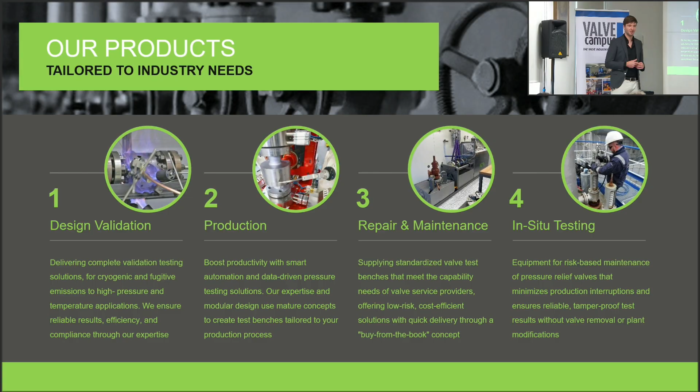Now, I'm not here to present about our products today, because I could spend a week talking about how fantastic our products are. But today I'd like to tell you about what we feel is our responsibility in the market, and that is to innovate with the perspective we have. Our company mission is to contribute to safety in the industry, and a direct derivative of that is the test bench, because it's a quality control device. We'd like to think that with input from all different players in the industry, we can improve these test benches to a point where they automatically contribute to safety in operation. This is one of the core things we'd like to do. This is our mission statement from our CEO, and exactly the reason why we're here, and why we do this on a voluntary basis. We don't get paid for this, we don't make money off of this, but we do have insights which could be very relevant.

To give you an impression of what we've done this year, for 2025 we had 3 main projects on our agenda. The first was to standardize on safety screens, because on a global scale there are a dozen fatalities while pressure testing every year. People who are not properly protected from the dangers of pressure in untested objects, causing incidents and in many cases loss of life. So we set out to standardize safety screens, just to make the decision for safety easier.

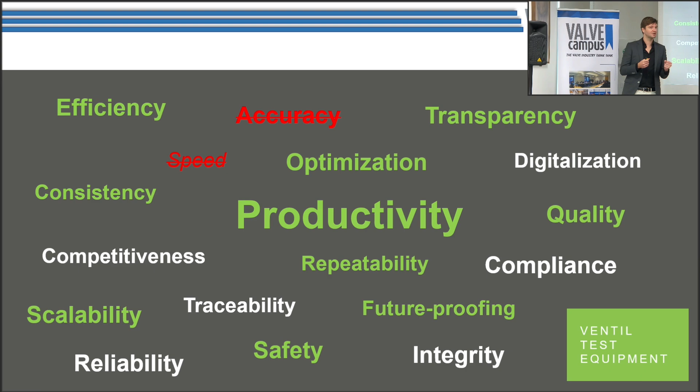Well, to carry on this, I think that at least two of these are never really relevant. So again, this is something I got from the internet, ChatGPT, just generalized information. And I always feel that accuracy and speed, they don't go hand in hand with automation. Because if you buy a CNC milling machine or a lathe, it doesn't get more accurate. You can't get more accurate parts produced from that machine because it's automatic. No, it has a high grade of repeatability, but not necessarily accuracy. Machining by hand could still be more accurate.

And it's the same argument with speed, especially for valve testing. Some things you cannot really speed up. So can a machine do something quicker than a human being can? If that human being has been doing it for decades, all of his professional career, then maybe he is much quicker at it because he has feeling, he has experience. He can correct for things on the fly, and a machine cannot do that. So speed is a very poor argument for automation. All of the others, I would say, probably relevant in some shape or form. But do they really give you an argument to automate your valve test bench today? I don't think so.

So let's bounce back a little bit. Because we're talking about automation, I could speak about this for days because it has many different aspects. So let's establish a small process to have a benchmark, to know what we're talking about. And let's consider a simple valve. So the standard is EN12266. Pretty much the basic valve that we know in the industry, right? You could argue, well, why not take an API 6A valve because it's much more elaborate. Quite simply, it's just more steps that I need to go through. It's just about establishing the benchmark for now. So let's take an EN12266 valve for the rest of the day. This is the benchmark process.

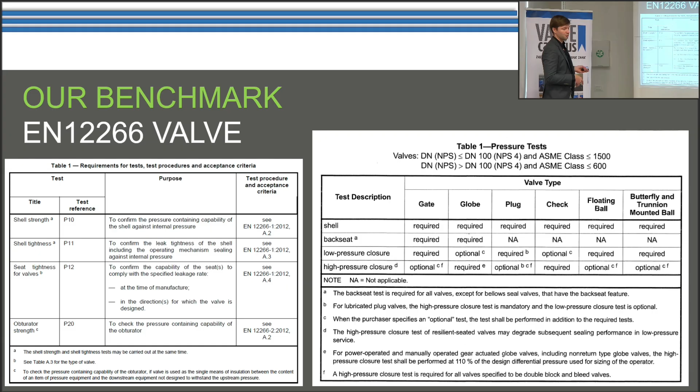And what do we have to do when it comes to testing? Again, keep it simple. If I look at the matrix for these standards, on the left here you see the requirement from EN12266, and on the right you can see API 598. There's a few small differences, but the essence is always the same. There's a few different tests that I need to go through, and it's the minimum that I need to provide. And it's the same if you follow any API, EN or ISO standard, because we always need to do similar things, right? So it's strength, tightness of the seats, and then probably something with what they call the obturator, which is essentially operating the valve, open and close.

So looking at definitions, throughout the presentation I will be using the codes. So P10 basically means the shell strength test. It's easy. I think everyone knows this, right? It's a hydrostatic test. Pressure is 1.5 times working pressure. There's a test time specified. It's based on the valve size. It's simple stuff. You can test it with liquids.

You can test it with gases. And the key thing here is that the criterion is visually detectable leakage for a liquid. So do I see water coming out? Then it's a leakage. And if I test with a gas, then essentially it's also visual leakage. Because either I use leak detector spray, which means that I get bubbles, and bubbles I can see, so I can see leakage. Or I submerge it in water and then I see bubbles again. So again, it's visual.

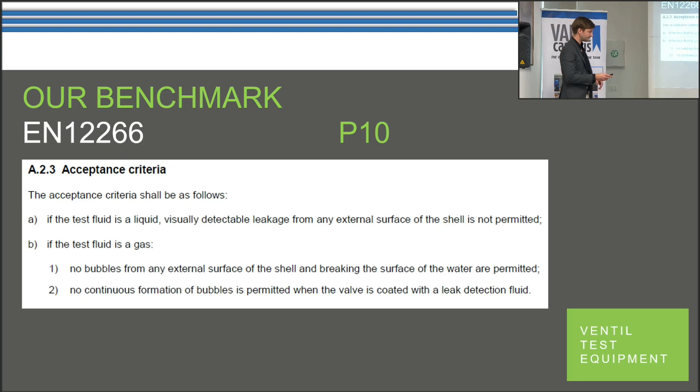Onwards. So these are criteria. Again, 100% visual. For P11, which is essentially external leak test, so it's a repetition of our strength test, but I don't need to do it at the same pressure level. So the standard actually tells you that you can combine both tests. So you can do one test and they represent P10 and P11. And again, the criteria is essentially the same. The only difference is that they demand that there is pressure on the entire valve.

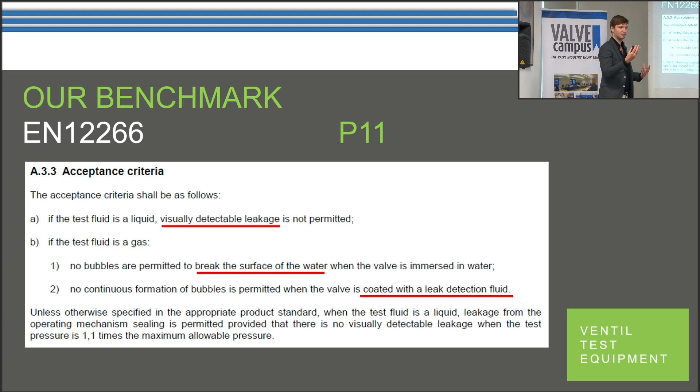So in API 598, they would call it, I think it's backseat pressure test, which means that pressure is everywhere. So you check the entire valve for leakage. But again, criteria is pretty much the same, right? It's visual leakage, period. And keep that in mind, because visual leakage is something very hard to automate.

So just to carry on, so we have seat testing. Now this is different, because here we have acceptable leak rates, which means that some valves are allowed to leak, which means that we want to be able to quantify leakages. So this is what you do with bubble counters, flow meters, instruments that everyone who has done a test will probably know.

And if I tie that together, we have a test process that we have to go through. The test process basically consists of, I need to do some setting up, because my valve doesn't seal by itself, so I either put it in a test bench or I put blind flanges on there. I need to do all my preparations to make sure that pressure can be contained inside that valve. That's what I call setting up. Again, we're just talking about benchmark process, so you understand my train of logic going on.

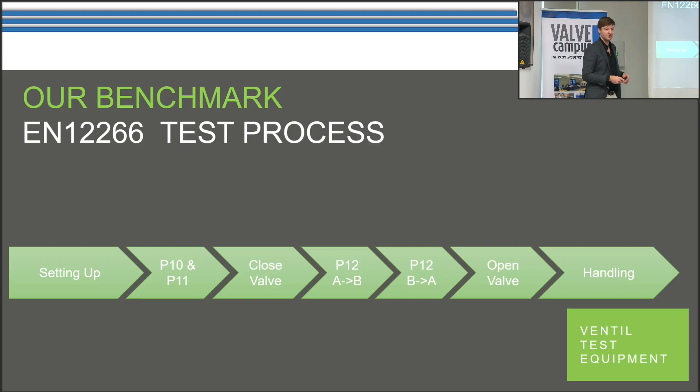Then if we're testing hydrostatically, we fill it with water. We can do test P10 and 11, which is a body test, shell test for the Americans. Then probably we have to close the valve. So this is operating the valve stem. We probably have to do 2 seat tests, so 2 different directions. We say one side is A, the other is B, so we have direction pressure A towards B and B towards A, which means pressure on one side, and the second side is the side where we measure leakage.

Once we've done that, we open the valve again, we drain it of water, and essentially it becomes handling again, because we need to do something to take it out of the process. So usually setting up is clamping the valve. It's things like setting up the process, filling, things that don't directly contribute to the test result, but we have to do it to be able to perform the test.

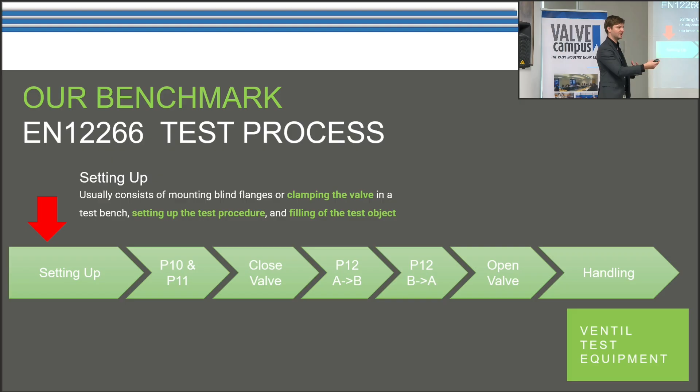Then main limiting factors, especially when you talk about speed, because I discredited speed. I said I cannot be faster per se, because in fact I have limiting factors. I have a particular test time that I need to follow. It's the minimum requirement, which means that I have to do it in a particular way, and there's no way I can stretch that. So clearly, I cannot touch this. This is what I have to do.

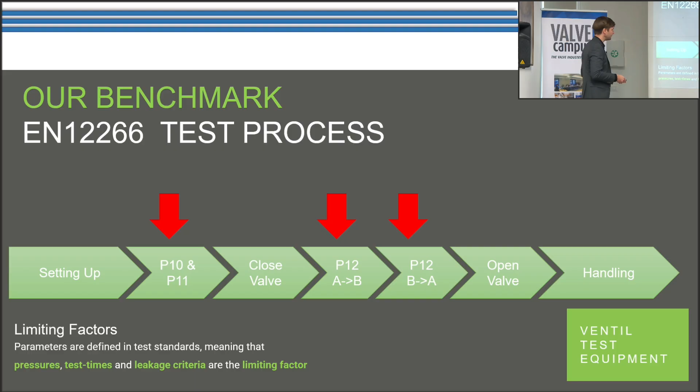Then opening and closing, it really depends on the valve that you produce and the information that you want to gather. I could open it by hand and register no information, just to see if I operate it, does it work? I could do it automatically. I could measure torque to see what is the slip-stick on my ball valve. Is there a point of resistance? I can even relate that back to, is it relevant to the process? So can I predict faults coming from my manufacturing process based on the data that I gather? But you don't necessarily have to, basically.

And then finally we have handling again. So it's draining, drying, preservation, things you need to do to make sure that the valve is ready to be put on a pallet and maybe shipped to a customer directly. So this is my benchmark process. This is what I'd like to use to talk about the main subjects, the main reasons for automation.

And again, I feel this is not what we're pursuing today. This is great high-level philosophy. This is a nice dream to have, but it's not tangible. It's not something you want to achieve within the next few years. I do not believe that these are the arguments you want to use. The arguments that you do want to pursue, because they will bring you some sort of benefit in fairly short time span, are to digitalize test results, to increase productivity, to have a sustainable workforce, and to have a more competitive edge.

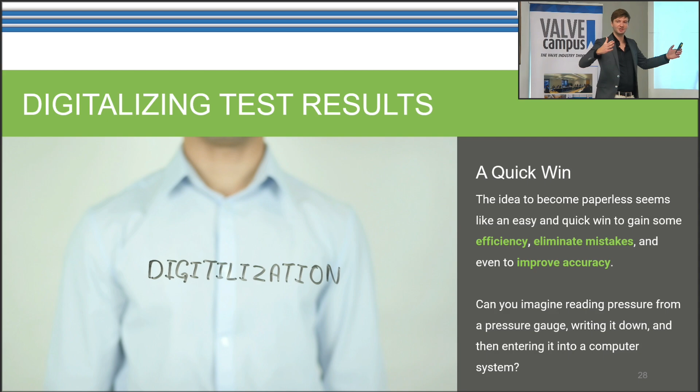So what went wrong? Very long time later, they found out that they had a test bench. And it was a hydraulic test bench, and it was a very unintelligent machine. So it relied on an operator. And the guy put so much force on the object that it actually shrunk. It got smaller because of what the operator did.

And the reason they didn't find it is that they did the dimensional check before testing. So everything's okay. I put it in the test bench. It gets smaller. I don't check it again. And now I have a quality issue.

So it's not necessarily about the test result that we're trying to achieve. It's about what do we do? What are the steps we go through so that we can build the confidence that this is okay, that this is good enough? Because in a perfect world, we want to eliminate that inspector, and we want to have a process that we can execute, and the result of that process is good enough that we can accept it as valid, as good enough. Because that brings you efficiency. It takes out cost. This is a form of automation.

So fast forward, if we look in the industry, what are the main initiatives to achieve things like this? There are very few that actually get off the ground, but the biggest one, which is getting traction nowadays, and you don't see it in the news, is the Material Digital Passport. And the Material Digital Passport is ultimately an initiative carried by IOGP. So it's a group of energy companies who join together in an effort to standardize specifications of valves under JIP 33, and they also have a specification on how the Material Digital Passport system should work.

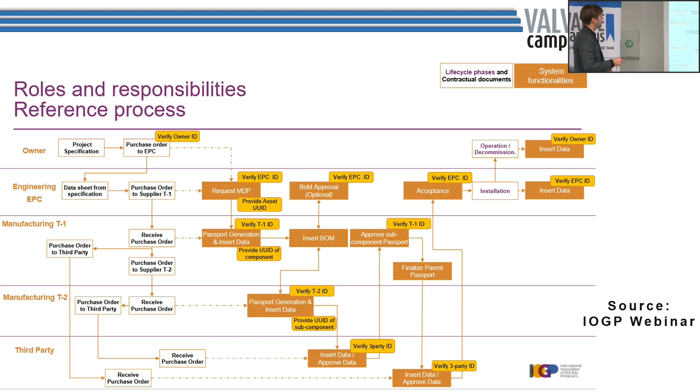Now, if I use one of the sheets to show the relevance of MDP, what you can see is that this is the entire simplified process. The idea is essentially that the end user, the owner, has a project specification, hopefully based on JIP 33, which means it's standardized, and they place a purchase order to their EPC. The moment they initiate the project, they essentially start by creating that MDP. So this is the birth of the identifier for every single component which is going to be used in your facility. If you think about it, I could talk about the entire rest of the process, the steps to initiate interaction between all the parties, because the EPC will buy valves from you, you will buy components from different suppliers, and everyone in the value chain ultimately needs to provide information, which is then verified by third parties, and all the different layers throughout the structure, which makes it a wholesome MDP.

But the reality is that if we look at what MDP actually is and what the structure is, I can sort of say that it's my ITP, my inspection and test plan. Because JIP 33 is essentially a purchase specification, and if you think about it, every valve standard is a purchase specification. It says this is what you need to do to provide a valve, this is the evidence you need to provide. MDP is the same, but the difference is that every component has an identifier, a unique code to differentiate it from all the other components. So MDP potentially has the ability to replace an ITP in a standardized format, which is beneficial, because when you get your purchase order, it means you already know what to do. From the system, you get the request basically from your ITP: this is what you need to provide in information. And the benefit of digitalization is that you tie every single thing together, which means I don't need to enter it by hand, which would be a waste of time, but I try to automate it. This is the essence.

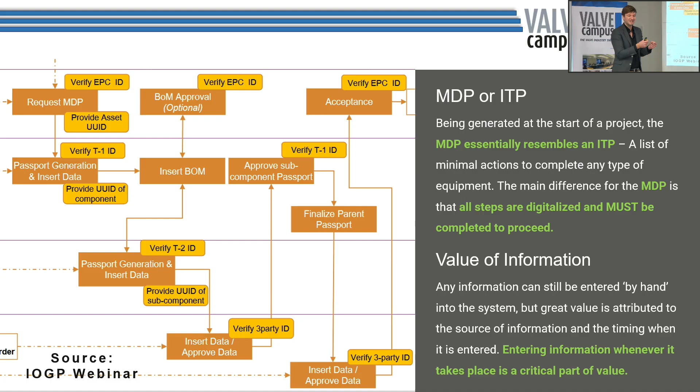So let's move forward, because now we have to talk about test benches, and I have to keep an eye on the time. So this was our benchmark process. So our EN12266 valve, how are we going to test it?

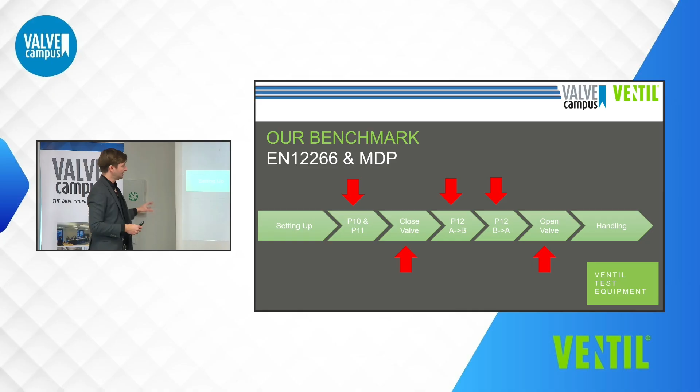The steps that we want to look at, the steps that are relevant for the MDP, are basically our pressure tests: strength, leak tightness, and seat testing. That's the minimum information that I want to provide. Depending on the kind of valve, I might need to provide information on opening and closing of the valve as well, especially if you're building actuators onto there, you might need to justify that. So this is all information that I want to register.

I want to capture that during my test. And if I look at the architecture that we use in our test benches, which is essentially a software architecture, we layer it in three different levels of control system, essentially.

So the most basic layer is instrumentation. In our instrumentation layer, we have the device itself that does a measurement, so a pressure transmitter, a torque cell, something capable of measuring our process parameter, which we need as evidence for our process.

Then the next layer is our control layer. What does the test bench do? Now again, I'm talking about an automatic test bench. If you think about, for instance, a strength test, it essentially consists of filling the valve with water if it's hydrostatic. Then I want to be sure it's full of water because it could alter my test result. If I have air, it could prevent me from seeing pressure decay, for instance.

I pressurize it to a particular pressure level. I want to know how long I stabilize my pressure before I start test time. Then I have test time, and afterwards I want to release it, but that's not relevant for the result. That's what happens in our PLC layer, a PLC that controls the actions of the machine to make sure you go through the process.

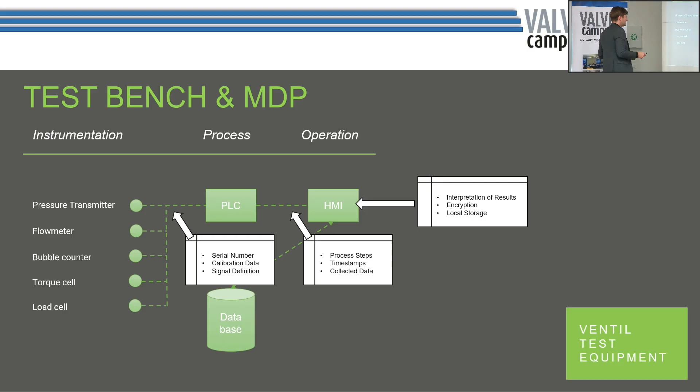So in that MDP, what happens is you get a purchase order in your own system, over here on the right. The moment your purchase order comes in, you get your tag numbers, your identifiers from the MDP, which is essentially turning into your ITP. This is going to be leading for the rest of the process.

And probably you have an ERP system where you enter that data, because you're a commercial organization, so there has to be some sort of work order.

Now then, two things could happen. Either it's a standard product for you, so it's a matter of press the button—and I know this sounds fantastic and might not be the case, but it's what we dream of. Then basically your manufacturing execution system knows what we're going to produce. Purchasing has to get the materials. We can schedule the work, allocate machinery and locations, and you get your project scheduled.

And the alternative is that you still have to do design. So for the test bench, the design phase is actually interesting, because some of those parameters, some of the features in your valve, might be relevant for how you perform the test. It's not test time, right? Could be, but not necessarily.

What it could be is that the dimension is so different that if you have a CNC test bench, you have to compensate for that. So you need to have that information in the system.

And the idea is that when you design a valve, you create your design, you prepare it for the manufacturing execution system, but you also put it into the test bench, because once you've designed it, you can build it again, basically. So there's a line of communication there, which has nothing to do with the MDP, but it is critical if you're really talking about automation.

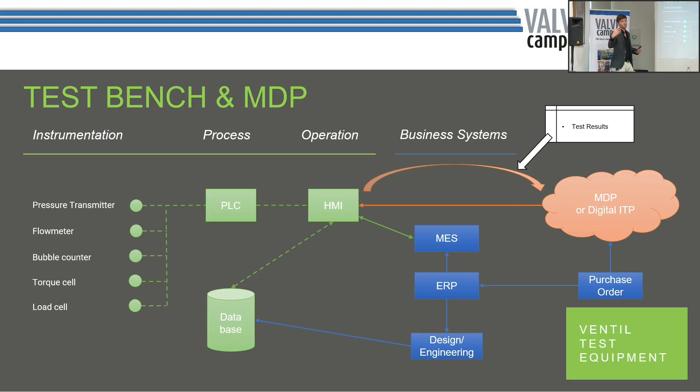The emphasis here is that if you look at a test bench, the thing we're doing on a daily basis, this element here, what I boxed, is something you can certify. This is the reason we asked that third party, is there a way we can certify the process of a test bench? Because if you're looking to save cost, to be more efficient, what you're trying to do is eliminate any losses along the way.

And it's some big things like, do I need an inspector to be there? Well, if he's not there, it saves money, it saves logistics, because generally when the inspector is there, it's quite an annoying time, except if he's a nice guy and pays for dinner, but generally we have to pay for dinner, right? So the better I can certify this process and create that layer of relevance, the less I have to do along the way, which means I can save money.

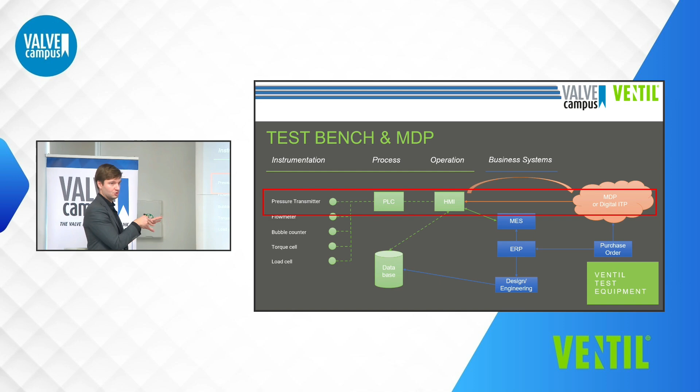And this is what test benches will do in the future. This is near future, what we're preparing to do in the next few years. Obviously the pilot phase will be difficult, but ultimately it's something that needs to happen and we'd rather do it now.

So our strategy is quite simple: we want to digitalize instrumentation, step one. We want unique identifiers on the measuring equipment, and we already do it for our online testing. Product group number 4 that I introduced to you is online testing of pressure relief valves.

In that system, we only use digital instrumentation, which means that when I choose a particular instrument and plug it into the system, it recognizes the range, and either it's correct or it's not, and then it will tell you we cannot proceed because this is not okay. It will tell you the serial number, the calibration data, which means that when we run the test, we know exactly how it was performed, and we know that the test result from that particular instrumentation is correct.

And then the next thing is that if you go through the process steps, we are essentially steering towards a process where you cannot deviate from the right steps to follow. So you have to do everything in the right order, which means you cannot tamper with the result.

For that online testing, for instance, it means that if you go through the steps, we actually record the steps that the operator goes through. So you get a certificate, but you also get a video of what someone did when he was doing the test, because it's evidence to show it's reasonable that he did it in an okay manner.

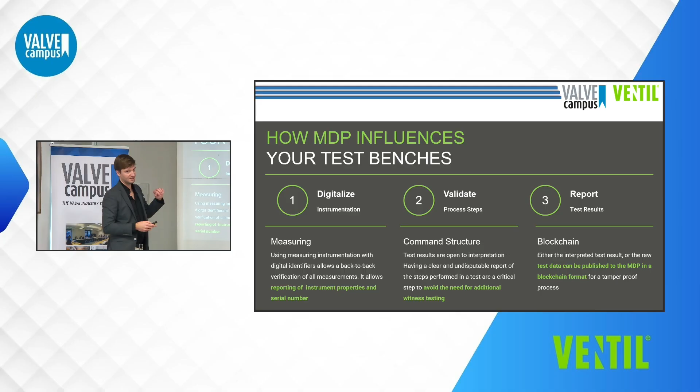And then ultimately, when you get that validated result, that package of information, exactly what you need to report, you would send it into that MDP, which is essentially, again, popular terms, but probably a blockchain encryption to make sure it's tamper-proof, and send it into that cloud where it's accessible to everyone. So this is the shift in test benches going forward.

Now I realize this sounds like future talk, could happen in 10 years, 20 years. I consider myself a young guy, but in 20 years I'll be thinking about retirement. So how relevant is this? And if I have to explain how relevant it is, I would say argument number 1 is that end users are saying this is going to save them 10 to 20% in costs for new projects.

And if you realize how big their projects are, the cost saving is huge. So for them, there's a big drive to do this. Even their lead time will go down by 25 to 40%, which is a huge saving for them. But it turns into our problem, because they save the money, but we don't, because we have to put in the effort, which means that we want to do it in advance. We want to think about it. We want to control the system, that it works for us. Not that the end user says you have to do it like this tomorrow, because then we have a problem and then we're probably more expensive.

Another interesting thing is that if you do things like this, inevitably it will be more efficient. So the investment is quite high, because you have to change your processes, you have to take into account everything you need to do to make this happen.

But actually, if you look at what we're trying to achieve, we're not shifting from Industry 3.0 to 4.0. If we're doing this, we're getting ahead of Industry 4.0. Because Industry 4.0 just means I want to capture big data so I can have an opinion about data. And Industry 5.0 is actually about how do I use that data to create more integrity. So looking into the future, Industry 4.0 is easy to achieve because I just measure something. I add a pressure transmitter, I record all of that data, and I can say I did Industry 4.0, period. Easy, easy win. Good for me. Maybe some government subsidies, love that, great. But the real story is that Industry 5.0 is happening today. So taking that data, going to that extra step in your factory.

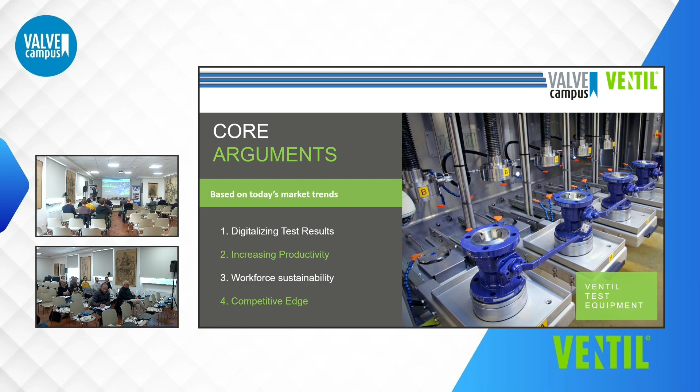So step one, just to remind you, this is our benchmark process. So still we have our EN 12266 valve, and the only thing we're pursuing for all of these test benches, just to simplify, is essentially body testing, seat testing, and everything we might need to do to that valve.

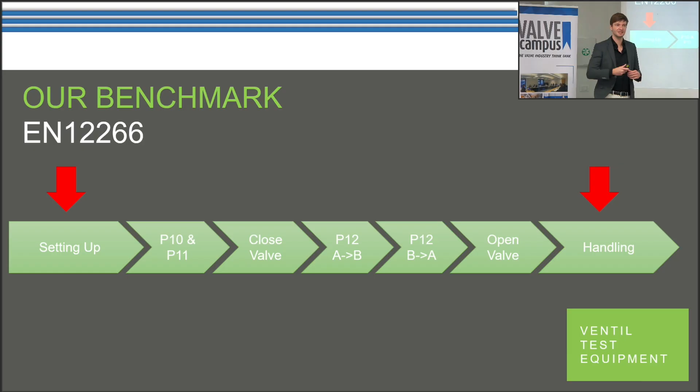So when we talk about increasing productivity, one of the first things that we can consider is the steps for setting up and handling, which is normally the task of an operator, someone who has to prepare the valve for testing. So he has to put it inside the test bench, he needs to put blind flanges on there, maybe he needs to operate the test bench by hand to go through particular steps. And in the end, he has to undo everything he did to the valve. So they're all steps which take time of a human being, but they are necessary things to do. So you have to go through them. And they are essentially steps that you can work on.

They're things that you can try and optimize, because ultimately if it saves time, then it will help your productivity, because the shorter the process takes, the more you can produce, which means you're more productive. Simple stuff.

So when you look specifically at setting up and handling, what you'll see is that about 99%, if not more, of all test benches worldwide are simply loaded and unloaded by hand, which means that it requires someone to be at the test bench to keep the test bench in operation. Whether you automate it or not, there is usually someone there who has to put the valves in, maybe has to open and close them as well.

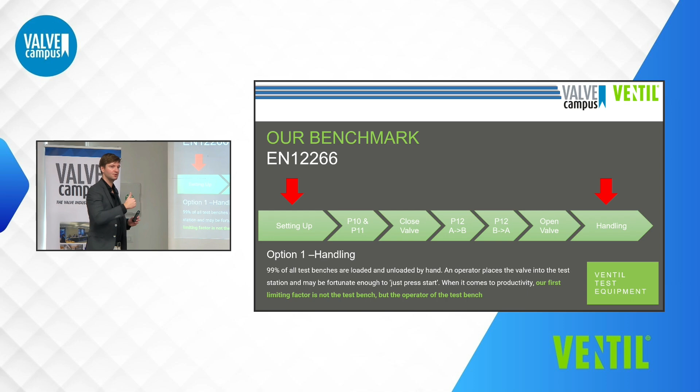So this is a limiting factor, period. The test bench can be super fast, but if we don't load the test bench quick enough and we don't take the valves out quick enough, then it's still going to be the bottleneck when we look at increasing productivity. So the obvious thing, and I'll go big straight away, is robotics. So why not replace a human being with a robot? It makes sense, right? This is what has been happening in mass production for years.

And there's a tendency that we feel we're replacing human beings, and we don't like that because we want people to have jobs. It's maybe a little bit unethical. Then in the valve industry, we tend to say, well, our operators really have to do something very specific. So it has to be done by hand because there's so much variation, or you need to compensate for it because you need experience knowing what you're doing. But the arguments are not per se very relevant. I'm not saying that these arguments are not true, but it's not so bad as what you think.

So the picture you see here is about a 600 kilogram robot, which means that when we put the gripper on there, basically it leaves you with about a 500 kilo valve that it can lift up, and it can place it in any different position you might want to have, which means that it can replace an operator working with a crane, essentially. So those steps are what we set out to do. You can even see that it's based on a track here, so it can actually drive back and forth.

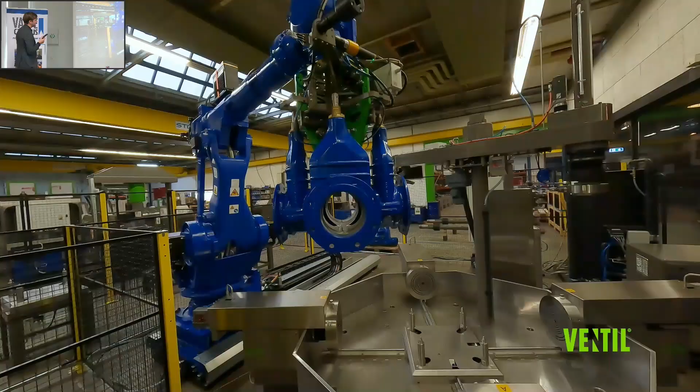So now is the cool part, because it's a video. This is the actual test bench in operation. And the background for this project is that it's a customer in Norway, and one of their products is these, basically they're multi-direction valves. And you might say, well, this is a standardized product, but it's not.

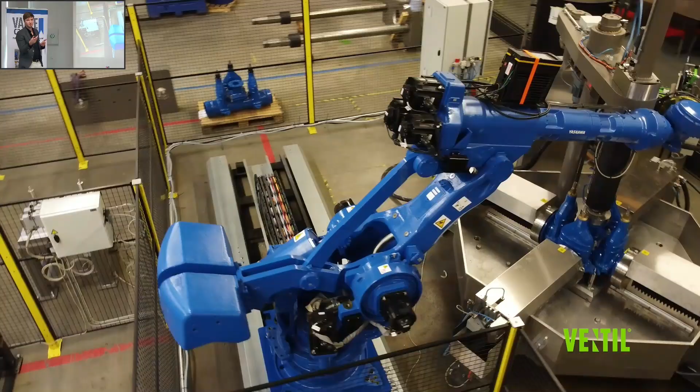Because if you look at the variation that they have, either it's a combination of 4 valves mounted to that same center body. It could also be 3 valves, could be 2 valves, could even be 1 valve. And then every single valve could have up to 25 different process connections, which means that the variation that you get for an assemble-to-order product is huge. And this is the reality that they have to deal with.

So their process is that they produce semi-finished products, which is the valves, the bodies, the process connections. They keep it on stock, and when they get an order, they assemble to order, which means that probably pretty much every single valve that goes into the machine is slightly different in some sort of way. And that is a challenge because you have to compensate for that. The process has to facilitate that. But it doesn't mean that it's a limitation necessarily.

In fact, it's an opportunity because assembling the valve is something only an operator can do because he has to be conscious of what he's doing. He has to take the right components, he has to assemble them in a particular way, which is a step which is very hard to automate because of that variation. It's hard to reach places, lifting the right materials. So it's something that would cost a lot of money to automate. And it's probably not worth it.

But like I mentioned, this is a customer in Norway, and I'll start the video again to keep you a little bit more entertained. So one of the problems in Norway is space, because it's in the mountains, so there's not a lot of space to expand your factory. If you really want to do a big expansion, probably you have to move to a different location, which is a problem.

The second problem is availability of people, because there's not so many places where there's a big workforce who are willing to work in a factory anymore. Because, well, Norway is doing quite well, wages are quite high, quality of life is quite good, so working in a factory is not very interesting per se. So, key thing here is that they did not have the people to be more productive, which means that with the people available they have to look at a way: can we optimize this by taking particular activities away from these people and making sure we can just carry on working.

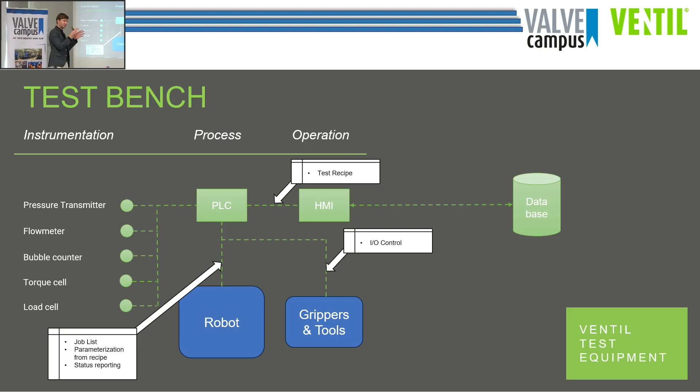The capability is such an underestimated advantage you could have in production, that as long as you integrate it in a way people can work with easily, you don't need more education. In fact, you need less education, because you can focus on the tasks people actually need to do, like assembling a valve.

So the emphasis is that basically everything happens in the HMI. Everything needs to happen in that centralized system. This morning we talked about why the HMI ties into the material digital passport, but it's also the way to operate an automated test bench. All of the complexity is behind that and managed by, well, let's call myself an expert, and my colleagues who do things like this.

Just so you get a very simple functional machine. My phone can do so many complicated things—the calculating power of this device is immense. If you imagine that this has more calculating power than the first rockets that flew to the moon and were able to safely land on the surface, they have less calculating power than this device.

And I use it to look on LinkedIn and read the news.

So the potential to really unlock it has to do with vision, practicality, and tying into production systems. There is no case which is exactly the same, and that's the reason why automation is so broad. It's also why we see it as something fairly scary, but it doesn't have to be, because automation can solve a lot of problems which occur daily. I guarantee that all of your companies, either now or in the near future, will have trouble finding qualified people to work in production, or to do something as important as testing, which is still interpretation of the quality of a produced product.

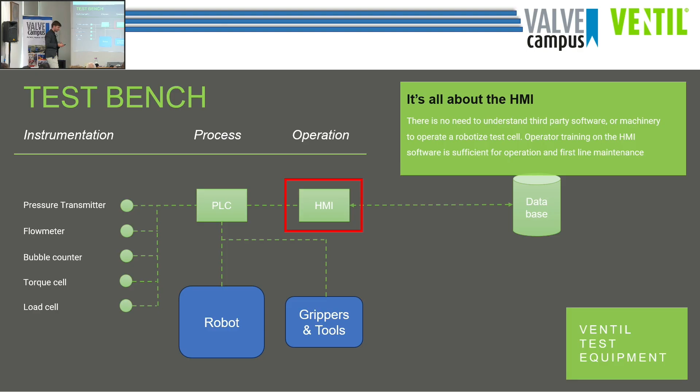But it doesn't have to be robots, because many of you will have multi-station test benches. Multi-station is a term we like to use, it's the branding we like to call it. Multi-station basically means that instead of having one clamping station to perform one single test, I add more stations, but in the same test bench, giving the impression that it's more productive. So one person can do more tests at the same time.

Looking at the developments for these multi-stations, essentially a decade ago machines were single thread, single result. Again, this is terminology we made up ourselves, but single thread means the machine can perform one action at the same time. So if I'm doing a body test, I'm doing that body test in all the stations at the same time, exactly the same thing in all stations.

In the olden days, a decade back, you would have one single test result. Everything would be connected. If I had 5 stations and did my body test, I'd get one single result, and if one of the valves leaked, all of them would fail. It sounds a bit inefficient, but this is the first level of multi-station.

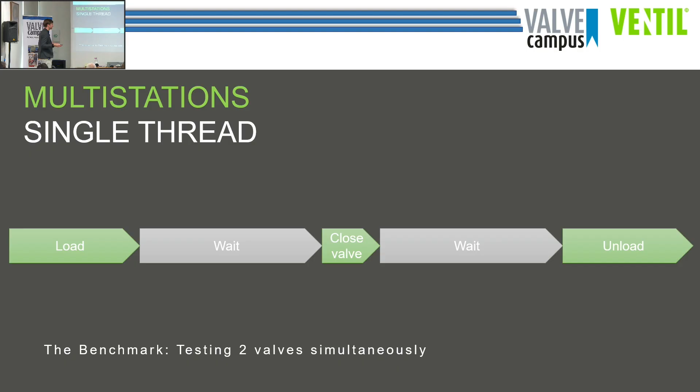So if I then go to a multi-thread concept, then what I can say is, well, if I only load 1 station, it takes less time, about half the time, because I only have to do 1 action, I'm done, tell the machine let's go, let's work, and I have to wait.

Then I proceed to load the 2nd station, because I'm waiting anyways, so it means that I can be more productive while the machine is also productive. Then again, I have waiting time. At some point, I need to close the valve as well. Waiting time again, and unload.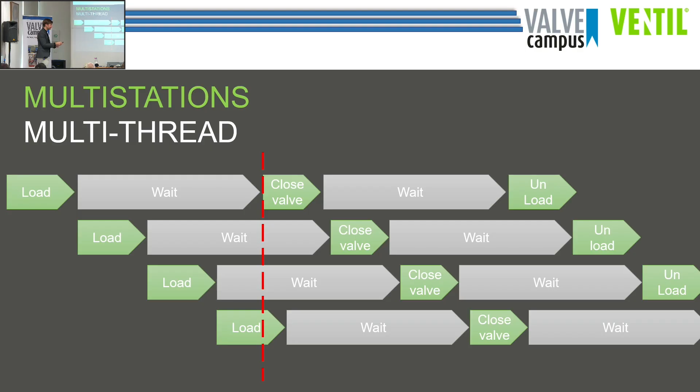And what it looks like, again, we have some nice videos. This is a multi-station test bench. And the interesting thing is that essentially this is one test bench. It has one test system with pressure pumps, which is a shared resource. But I can independently test in all of the stations.

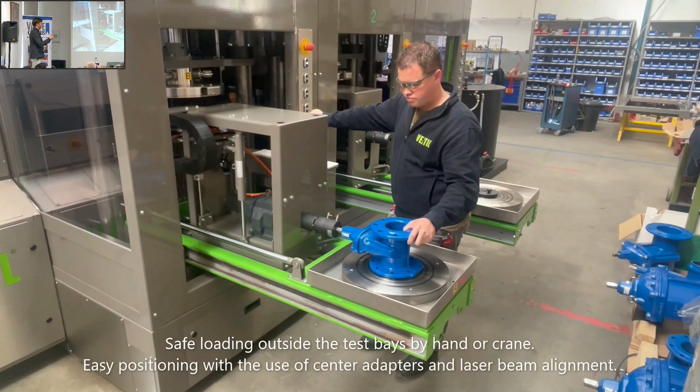And it goes to a point that I could have a fairly small valve in the first station. And it's an automated process, so you can see that we have what we call a nut runner. So it's the system to open and close the valve. And it uses a load cell to register the actual torque along the entire way of closing.

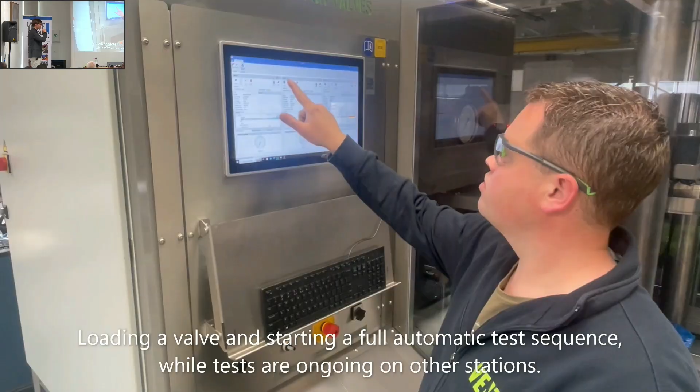And what happens is when my colleagues put the valve inside the test bench, even though some of the steps are still manual things because they're easier to do by hand if you have big variation, he starts the test process and he loads a completely different valve in a second station. And in the third station, he could test a completely different valve as well.

And it goes to a point that it doesn't matter if you have different pressure levels, it doesn't matter if you have different geometries, if you have different tools in these different stations. Essentially, you have one test bench which you could use to either test the same model simultaneously, just as quickly as you can, or if you get different work orders at the machine, and maybe you have a work order for 10 small valves and 20 bigger valves, you can have the two work orders running simultaneously.

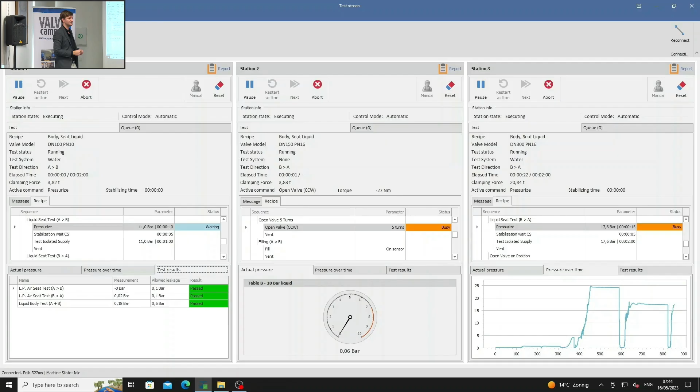The efficient thing here is that if you get expensive components like pressure pumps, or for gas testing, automatic gas regulators which are accurate and fast, they're quite expensive. So they're all resources that you can use more efficiently simply by having them as a shared resource. So they become more productive. It's like a robot - if I have a robot but it doesn't do anything, it's not productive.

But if I have a task for the robot all the time, it's more efficient, and the return on investment is more interesting because I can be more productive. So that combination of automated steps, if you match it to your production process, will ultimately make you more productive without having to have more people. Because if I compare my single thread machine, my two-station machine, with my multi-thread with 4 stations, I can see it has almost double the output, but I don't need more people.

I don't even need robotics. So even if I want to, I can still rely on a human workforce to do the physical labor here. And even every single step in between - in the video you saw these steps to open and close, they're automated. There are many cases where you don't want that, or maybe you have valves with an actuator - you could still automate it, but you don't have to. You could always have manual steps in the process, but the trick about automation is to find the most sensible workload for the people or resource working at the machine, because that will bring you productivity.

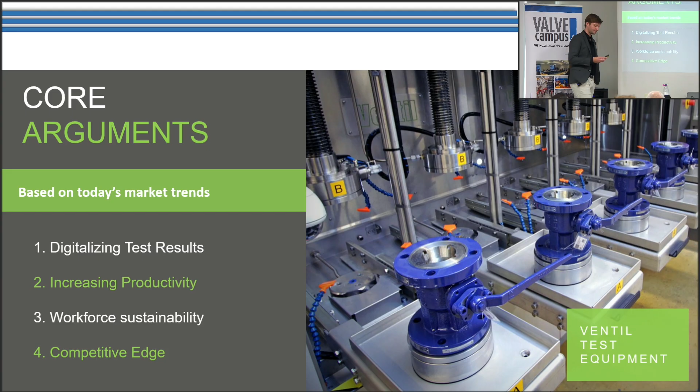So the next thing, which is perhaps the most relevant subject today, is workforce sustainability. And what do I mean by that? It's simply getting people to work in your factory. Because if you rely on a workforce, you have to have people who are capable of doing the work for you. It's a very simple thing: if there's no people, you cannot be productive.

And the interesting trend is that even the European Union basically says there is no lack of work. Our economy is in a good position, we have plenty of work, we're getting plenty of orders, so there's many things to do. But the thing we're lacking is the hands to do the work. So we lack skilled people to actually deliver the material, ultimately, to do the machining, to do the assembly, to do testing. So it's a big concern.

You'll probably notice that, especially with a younger generation of engineers starting their professional careers, they have a completely different interest. So probably your most experienced worker, who might retire in the next 10 years, you will never be able to replace with someone who has the same working mindset, because the mindset is simply different, which means you have to do it in a different way, because there is no one-in-one replacement.

And this happens everywhere. In the Netherlands, we struggle to get the right people to work on particular jobs, and we struggle to keep them. Because how do you keep people interested, especially in a repetitive job like testing? Because ultimately, working on a test bench is repetitive work.

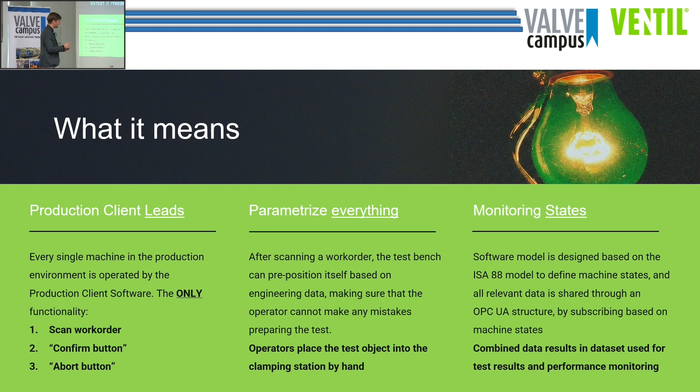So if you look at the way that their system is organized, their production client, essentially they're saying we have a purchase order which goes into our ERP system, and from the ERP system we know what the production client needs to do, because every product is a combination of materials which is known in the ERP system. So what we're building is a combination of things which have been engineered and have been purchased, etc.

So the production client is actually directly controlling the HMI, which means that on our test bench, you have 2 screens. One of them is our software, which tells you exactly what the machine is doing. But the way you operate it is with their production client. And if you press OK, their software layer will control the test bench itself.

So to do that, obviously from the ERP system, you need to have data entered into the database. So if you have a different pressure class, you need to have that deviation inside the production client linked to a serial number. And if there's an engineered product, so maybe it's an engineer to order, then you need to have input from the engineering department. And from that database, everything is loaded into the test bench, basically.

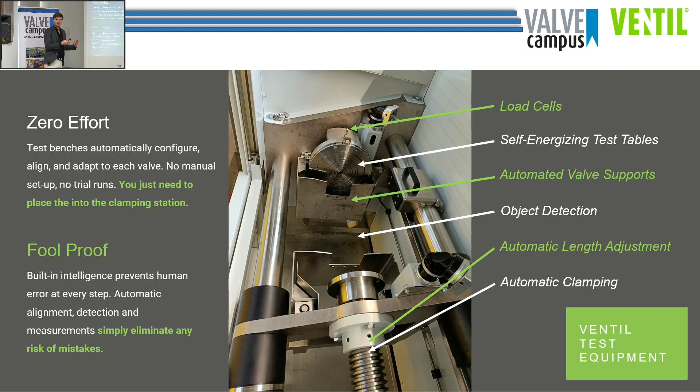Yeah, it's height controlled with servo motors. So there's... exactly. Exactly. So it's just tools to make things easier for an operator, which result in him being more productive.

So one more thing, just to jump ahead. So if you look at standardization of machinery, there is a principle called ISA 88, which is a machine state model. And it's the intention that if you standardize the state of a machine, all of the infrastructure in your factory could rely on data based on the state of your machine. And this is a standard which has been out there for a very, very long time.

And it's a model which basically says, how do I handle situations in my machine state? So there's different routing, which is not per se relevant for this presentation. But this is an international standard on how machines should work. And if you look at machinery in factories and how they actually work, many of them don't really use this state. And the opportunity here is that if every single machine in your factory follows the same protocol, it's actually a lot easier to tie into different systems.

So you can optimize your Industry 4.0 effort because you can measure much better what is going on in your factory. But even if every machine works in the same way and the communication protocol is always the same, it's not so complicated to look at things like the material digital passport, because if you do it in one machine, you can do it in all machines.

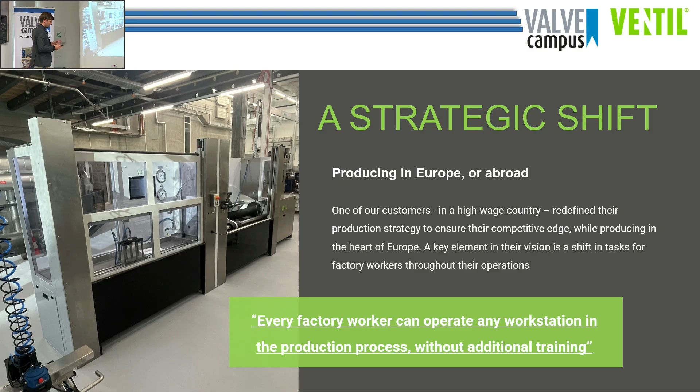I have one question—probably I don't know if it's the right moment or later—just to understand if you have any solution for the test with kerosene that is typically asked for alkylation valves, UOP service and so on, because we have many issues about safety due to the ATEX issue, but especially due to the operator having some problems with the skin and the kerosene. So I don't know if there are also some accepted alternatives.

Now some customers change a little bit, they accept some alternatives. I have the answer for you, because we get these questions, and we actually put in the effort to see if we can replace kerosene with something else. The answer is yes, because if you look at kerosene—which is jet fuel essentially—jet fuel systems like an aircraft engine, when they test it, they don't always do it with kerosene. They have what they call calibration fluids, available in the market, which are non-flammable and not as bad for your health, so you can actually store them in your factory. It's more practical because of the health and safety element, but it behaves the same way as kerosene, and the argument of corrosion and things like that you don't get, because it's an equivalent.

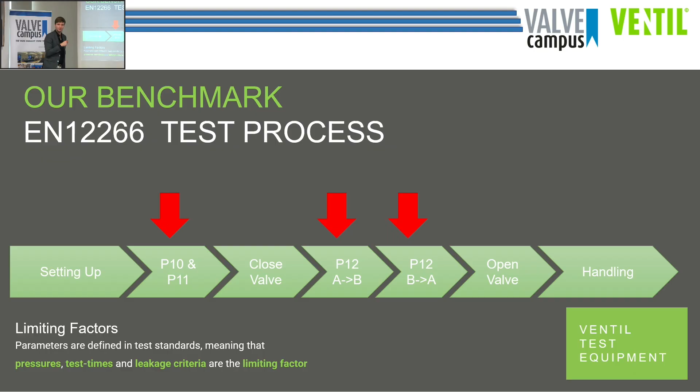If you look at EN 12266, it actually allows you to deviate from test pressures as long as you provide evidence that the test process is equivalent. One of the strategies commonly used is to use statistics for that—basically saying, I have so many tests that go okay, so the quality output is probably good enough. But if you use the physics of the difference between liquid and gas leakages, you can provide evidence that it's equivalent with a much shorter test time, because you can compare the two. So there was some basis to do this—it's not a cowboy project, it's actually allowed in a particular way. But we tried to steer clear from statistics and look at a physical process instead, because it's easier to justify and have the process certified.

One of the things we did is we took valves from production and all the production defects that had been found over the past years on equivalent valves, and we built a small prototype setup to see if we could spot leakages and how much time we would need to see those leakages.

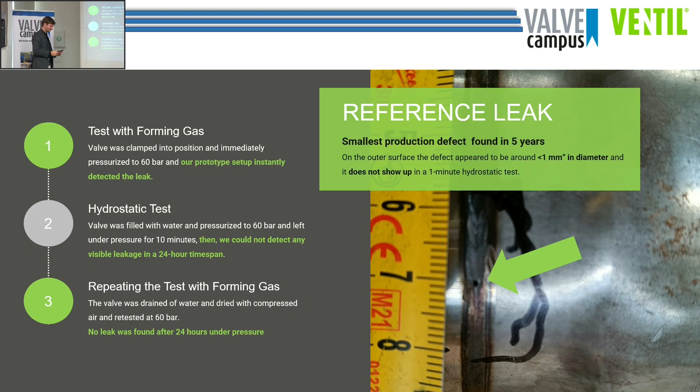This was quite interesting, because then the definition becomes: how do I define a leak-tight valve? So we turned to theory and said, well, for an absolutely leak-tight valve, we have to consider that there is a defect, and if there's water in the defect, we can consider that the water is essentially in a capillary. If the capillary is in equilibrium, there is no movement, which means there's no potential for the droplet to move outside of the valve—meaning it's absolutely leak-tight, even though there's still a microchannel towards the outside.

So we calculated that based on the parameters and the materials, and found what would be the maximum radius—this is the point of equilibrium. But it doesn't really tell me anything, because it's just a very small number. So then we figured, let's switch to: what if we take that dimension of the capillary and calculate the gas leak rate?

And that's an interesting thing to do, because now you could see, well, actually there is something coming out of there. So when it's absolutely leak-tight in water, it would still leak with gas.

But the reality is that if you're a bit familiar with fugitive emission leak rates, you know that the units are millibar liter per second, and probably you know that class AH valve is pretty close to what is the natural background of helium in the air, right? So it's already a very small number, and the magnitude of that number is 10 to the minus 6.

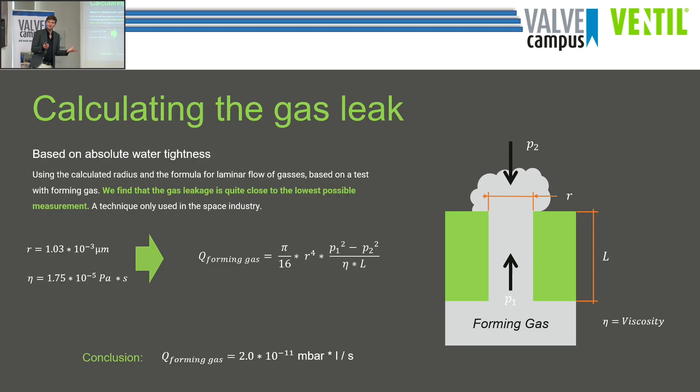So the magnitude is it's a bit overkill, basically. Because the standard, the only thing it asks of us is that it's leak tight for 1 minute, and then it's good enough. So that should be the sort of criteria that we look for. So it didn't really give us a clear answer, because hopefully we were hoping for such a clear number that we could say this is absolutely leak tight. And testing with gas makes it much easier.

So how do we approach leak tightness then? And it raised the question, can we actually predict water leakages or gas leakages based on test results that we get? And that was quite an interesting exercise, because what we did is we took our valve, the one with the defect.

We made sure that it had no water in there, so it was actually leaking. And with a hydrogen leak detector, we did a measurement. That measurement gave us a value of 1 times 10 to the minus 3 millibar liter per second, which is quite poor if you talk about fugitive emissions. So it's quite a big leak, basically. Based on that, we calculated the defect size, which is a much bigger number than our absolute leak tightness.

And we calculated how long it would take for one droplet to form on the outside. And now everything makes sense, because we kept it under pressure for 24 hours, which was not enough, because it was actually nearly 30 hours. So the trick is obviously that if you're in a workshop environment and you leave it under pressure for such a long time, probably the water will actually evaporate before the droplet will form, right?

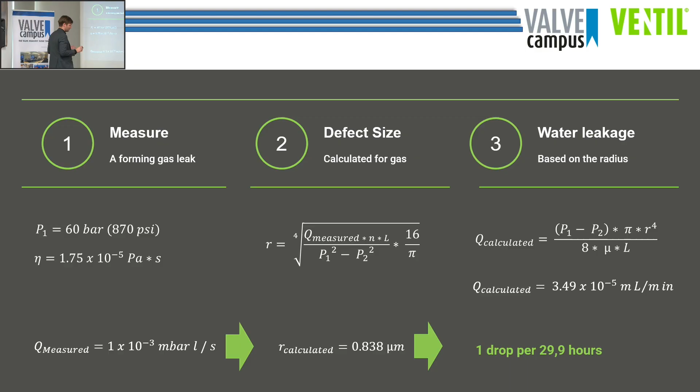So the probability that you would ever catch a droplet on this particular valve is near to none. It's not realistic. But if you do this exercise with different sizes of leakages, actually you see that the correlation is quite predictable between them, which means that based on the gas leak rate that you see, you can actually predict whether it would leak within a particular time span in water. So it actually is quite a predictable process.

And with that in mind, we actually built the machine for this. The idea behind the machine is that we are just looking for pass-fail results. This was for FAT in our workshop. In reality, it's actually built into a welding cell, so there's absolutely no human interaction whatsoever with this machine. It runs 100% automatically, and it uses hydrogen leak detectors to follow leakage paths where there's a probability of leakage.

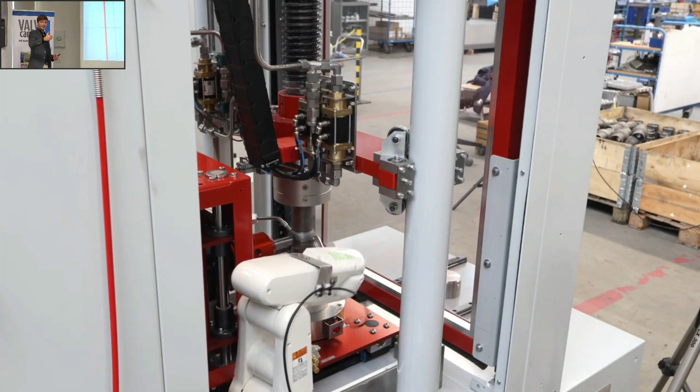And the moment that it's not actively following a leak path, the sniffers will actually spot out different locations to see if there are leakages from improbable locations. And the most interesting thing about this is, first of all, that cycle time, we managed to achieve, because we managed to do one valve every 83 seconds, which is fantastic, because we saved so much time, which is good for the competitive edge of this customer.

But more interestingly, do you remember that we talked about the criteria for a body test, which is essentially visual leakage? So in any automated test bench, based on a liquid, the only thing you could look for is pressure decay, which is a notoriously bad indicator for leakages, because it's influenced by volume of gas present, it's influenced by temperature, and it's very susceptible to me having a bottle of wine the evening before, because it relies on someone watching if there is a leakage.

And this concept uses hydrogen leak detectors, so it means that any leakage on the outside, actually, you can detect it automatically, because it's an electronic signal. You can even quantify it. So you can even say, based on this amount of leakage, I know what the production defect is.

And the interesting thing is, actually what you see is that if a particular amount of leakage comes out of the body, it actually indicates that there is a misalignment in the welding jig of the valve. So if you get a valve above a particular criteria, it makes more sense to stop the line, make your correction, because there's no point making not okay valves.

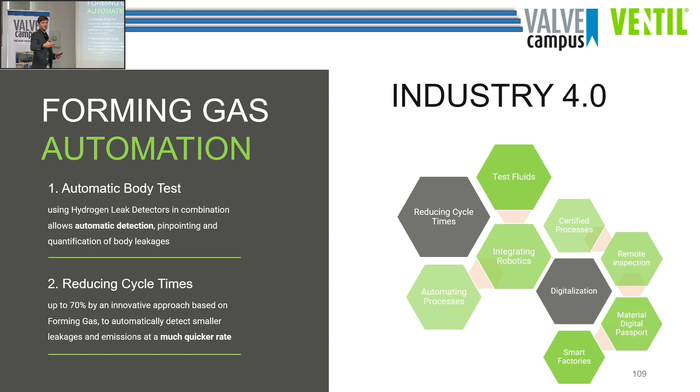Finally, some insights about gas testing before we go to lunch. If you look at our example valve, that little defect we could hardly see in the picture—you have to realize that valve would have passed a hydrostatic test. I could have pressurized it for 1 minute and not seen anything, which means it would have gone to the field. It could have been installed, but it would actually have a carbon footprint of over 0.5 kilo per year coming directly from that leak point.

0.5 kilo of CO2 emissions per year doesn't seem like much, but end users of valves report that 25% of all leaking valves in the field are related to pinhole leaks, similar to what you've seen here—it's actually a huge effect. So testing with a gas actually matters quite a bit for the test result.

And with that, I will not deny you lunch.

Well, I hope you had a wonderful lunch. I sure had. Very nice.

Now for our afternoon program, we have 2 different subjects on the schedule. First is the forming gas story, which we talked about a little before lunch—now let me tell you the background of how we came about it. Afterwards we'll do a very short break. It takes about 1 hour for the presentation and questions, and then we'll switch to testing at minus 250 degrees Celsius.

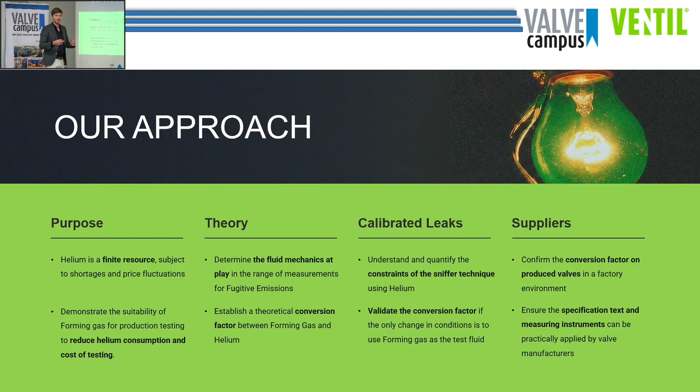And the interesting thing along the way is that we found that there's a lack of knowledge when it comes to leakages altogether, let alone fugitive emissions. Because when I speak about leakages, I think they're quite big, right? It's a leak I can hear, I can see. It's quite drastic. It's big, it's bubbles, it's droplets. And then what we call emissions are things that are very small and difficult to see, to a point where we need an instrument to understand how much actually comes out.

And one of the things that I've heard many times is actually the statement here: helium leaks the fastest because it has the smallest molecule size. And that's wrong. And I brought a helium leak with me just to illustrate the idea. So I borrowed this from my nephew. I think you can imagine how old he is.

And if I explain the theory that the molecule size plays a role in the ability to leak, I have to consider that this is sort of egg shape, that the ability to leak depends on basically the shape here. So it fits through, so it has potential to leak. Now this is slightly egg-shaped, so if I rotate it, it doesn't go through. Now I'm not sure what the shape of a helium molecule is. And I question if it's relevant.

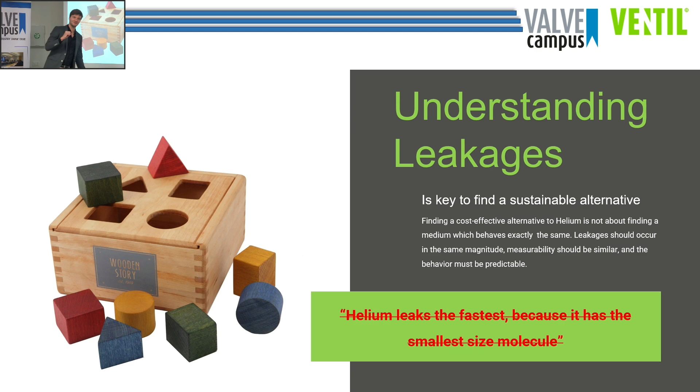And this is just one myth about leakages, which is entirely wrong, but everyone will resonate this. If you're in a room with valve experts and you talk about what leaks faster, they will say helium, because of molecule size. And there are so many more myths. There's things like partial pressure. It plays a role, this and that, but it doesn't. It's all misconception. So when we talk about leakages, we have to understand the scale of leakage.

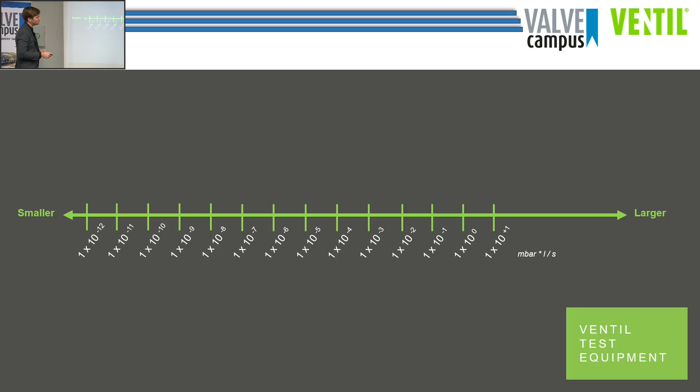So what I did, I drew a line here, and this is in units of 10 in the unit millibar liter per second, so the unit that we use for fugitive emission testing, from somewhere quite big to what we consider to be fugitive emissions here, and then the lower end of the spectrum, what a mass spectrometer could theoretically measure.

So if I then add some parameters, the relevance of the behavior of leakage is that, first of all, we have a concept called viscous flow, which is laminar and turbulent flow, for instance. I think we all know the principles because we're into valves. But there's also a transition point and a point where flow turns into molecular flow.

And molecular flow is different in the sense that there is so much space between molecules that in theory, a molecule could leak in a different direction, which means that at the same time I can have leakage going outside and going inside, because the molecules don't collide, so they don't push the leakage outwards.

So the transition point is actually quite important, and if we compare it to conventional testing, you can actually see that if you look at high pressure gas testing and hydrostatic testing, there is a clear limitation to what you can actually measure, right? So the principle of those conventional tests would not allow you to do something like a fugitive emission test, simply because the measuring method isn't accurate enough. And it mostly relies on visuals, right? So it's droplets, it's bubbles, things like that.

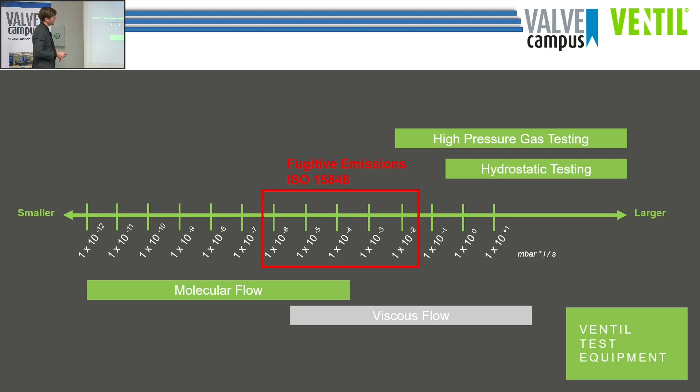Then if we look at the spectrum for fugitive emissions, basically we're saying for level AH, BH, CH, this is the range where we're looking. So CH overlaps with high pressure gas testing, and what you can see is for level AH and BH, which is essentially here, there's a combination of molecular flow and viscous flow.

So just for information, if we then add background, so helium background, for instance, is what I refer to as the amount of helium in the air here today. So there is helium in the air, and the level is just about here. So it's 1 times 10 to the minus 6, give or take. And that's why your criteria for fugitive emission testing based on sniffer method is 2 times 10 to the minus 6, because that's the first realistic measurement that you can take where you're above the background. And that's why this is what we call fugitive emissions. It's limited by measuring principle.

Then looking at the criteria, so level AH, basically we're just outside the spectrum, but what you have to realize, obviously the criteria that we set is based on stem diameter multiplied by leakage criteria. So this is the starting point for each leak level, but in reality it's actually a little further above in the line. So what people tend to forget is that every single step here is a factor of 10. So the gap between a level AH valve towards something you could test with high pressure gas testing is huge. The factor is enormous. It's really a different scale of testing.

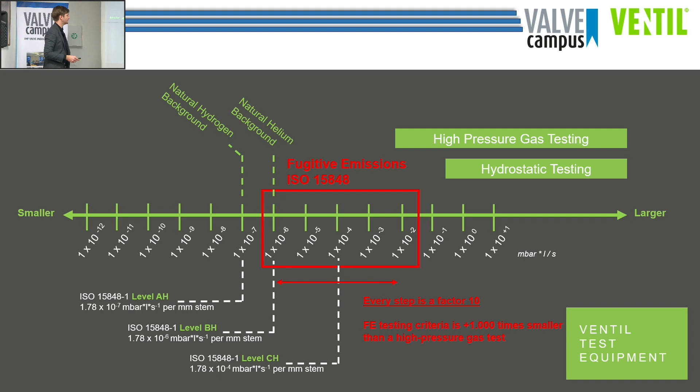So going a level further, if we zoom in, this is basically what we see as the realistic criteria for fugitive emission testing. And this is based on what you can find in ISO 15848. In the end, in Annex C, there is a table where they multiply stem diameter with leakage criteria, basically. So this is what we realistically expect.

Then to go one step further into our criteria, if you read the standards, you can actually find that there's different methods of testing that you can do for testing of valves. And for instance, if you look at ISO 15848-1 for design validation, it holds all the descriptions of the test methods. And basically we have the vacuum method, where we eliminate background and then we are able to measure more accurately. We have the suck-through method, which essentially tries to eliminate a little bit of background, and then it allows a bit of accumulation, so it should be slightly more accurate, but it depends on how well you do the test, basically.

And then finally we have the sniffing method, and the important thing here is that this is what we focused on in our research exclusively, because this is the method that you use for FAT testing. And practically it means that you have a sniffer and you measure by hand on the valve or by robot, like you saw in the video, and you accept that there is natural background. So you limit the measurability, but you accept that it's good enough for FAT testing.

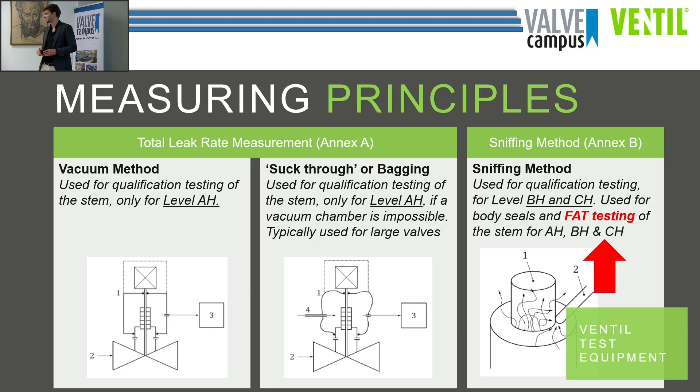So now onwards to the relevance of viscous flow versus molecular flow. So step 1 for us was to determine what kind of flow can we expect. And the easiest way to do it is to just calculate it, because there is something called the Knudsen number. And the Knudsen number is something you can calculate, and it should give you an impression of whether it's molecular flow, viscous flow, or if it's a mixture of both.

So what we did is we took some parameters based on valve standards, surface roughness, tolerances. We entered the data, and basically it tells us it's transitional flow, which is a bit of a shame, because transitional flow is undefined. It could be more molecular flow, could be more viscous flow. So we don't know, which means that we need to test.

The interesting thing, though, is that if you look at the formulas that you would use for viscous flow, for instance, if you use laminar flow, which we presume is a fairly small leakage, so closer to fugitive emissions compared to turbulent flow, you can look at the formula, and then, because we're trying to compare helium with forming gas, we concluded that the only factor that plays a role on the magnitude of leakage, which is related to the gas, is viscosity.

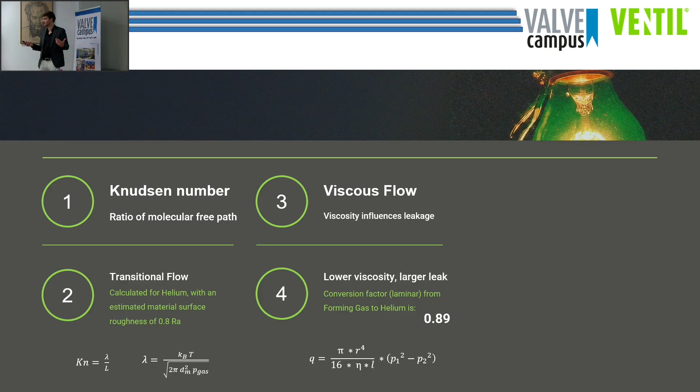Which means that if I change the gas, then the factor determining how much comes out is viscosity. And if we then calculate theoretically what the transition is, the conversion factor for laminar flow from forming gas to helium is 0.89, which means that if I multiply my forming gas leak by this factor, my helium leak is actually less than my forming gas leak. And that shows great promise, because it means that there's good potential that you can use it for fugitive emission testing.

But if you do the same for molecular flow, you find that the formula is very different, and instead of viscosity, molecular mass starts to play a role. And now it's interesting, because the average molecular mass of forming gas is much higher compared to that of helium. So that same conversion factor here is actually a factor of 2.58, which means that if I would measure in forming gas, in reality my helium leak would leak more. So the behavior actually changes depending on what kind of flow you have. So establishing what kind of flow regime is relevant for FE testing determines the conversion factor between the gases.

And if you compare different gases, you actually find the specific reason why the Americans like to test with methane. Because on the left here you can see the conversion factors for viscous flow, and I've ordered them in which leaks the most. So hydrogen leaks the most, then methane, nitrogen, air, and helium. So for viscous flow, helium is actually not a very good test medium because it will leak less compared to the other test mediums. And that's why the Americans, who have quite a high acceptable leak rate, say you have to test with methane, because this is much closer to process conditions, and the gap here, my conversion factor, is 1 3/4, so it's quite significant.

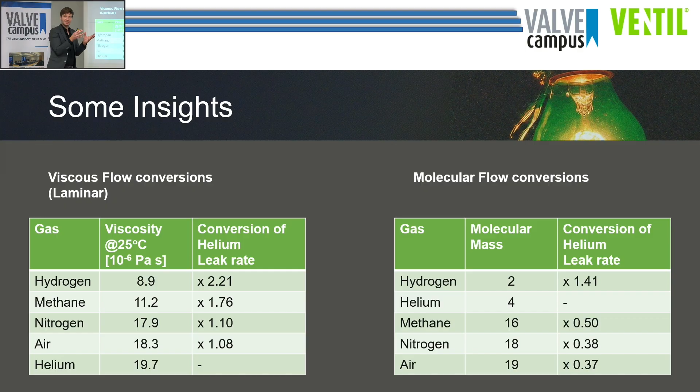So fast forward to what we've done. We did testing based on calibrated leaks, which means that we had leakage with a reference where we knew this is the amount of leakage that we can expect from this part, and we can validate that. So we can take a helium mass spectrometer and measure if we can actually achieve that value. And because it's a microcapillary, we can change the gas, so all the conditions remain exactly the same, temperatures, geometry. The only thing changing is the gas, and we can use the same instrument and different instruments to see how much comes out.

And we did that in all the different magnitudes that we saw. So we said, worst case, we would have 1 × 10⁻⁷, which theoretically you cannot measure, and theory and practice align here because we couldn't measure. The next one is 10⁻⁶, 10⁻⁵, 10⁻⁴, 10⁻³. So we get the full spectrum to understand, is there a tipping point where the rules don't apply anymore? Because we want to provide a solution which adds to quality, not unnecessary costs or unnecessary incidents, quality defects in the field.

So fast forward, what we found is that forming gas was actually a very good solution. Throughout the range that we tried to test, we found that we could prove the equivalence of helium and forming gas with just about the same effort. So it worked throughout the entire spectrum. So it's a viable alternative for helium, which is fantastic because the cost of gas is about 1/10 the price of helium. It all depends on your supplier, obviously, but it's the rule that applies to us. It's much cheaper to buy, and I can always buy it in the market.

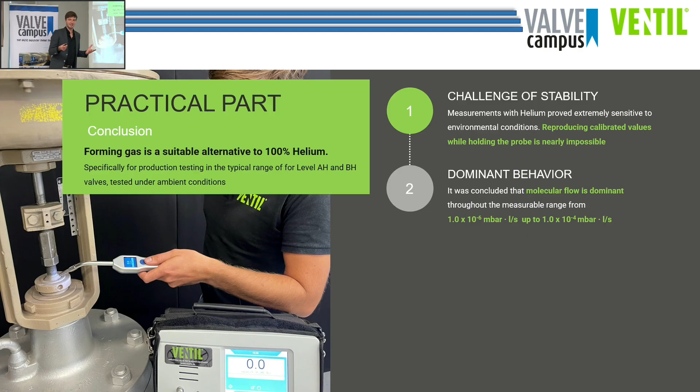And because we saw some difference in measuring equipment, because we used different brand mass spectrometers, different brand hydrogen leak detectors, we settled on a slightly more conservative conversion factor, just to be sure. So the results are consistent, but because we don't want to cause issues from missing anything, we settled on taking a slightly more conservative approach and writing that into the standards.

And the interesting thing about using different style detectors is that there is a huge difference in performance when you compare leak detectors. The most common one that probably most of you have is a helium leak detector or helium mass spectrometer - basically the same device, different name. There is simply a difference in construction. Some of them are built for vacuum systems, which means they have an oil pump, because they need to draw a larger capacity of vacuum, and others don't. They're really built as sniffer devices.

And their ability to measure is quite different, especially when you switch to forming gas, because forming gas is a mixture of 5% hydrogen combined with 95% nitrogen, which is non-flammable, so there's no additional safety risk compared to testing with nitrogen. But the tracer component is hydrogen. And the thing that happens is that if your mass spectrometer has a tendency to draw a little bit of fumes from the oil pump, which most of them do, it actually shows up as background hydrogen, because it will start to degas and influence the measurement that you have.

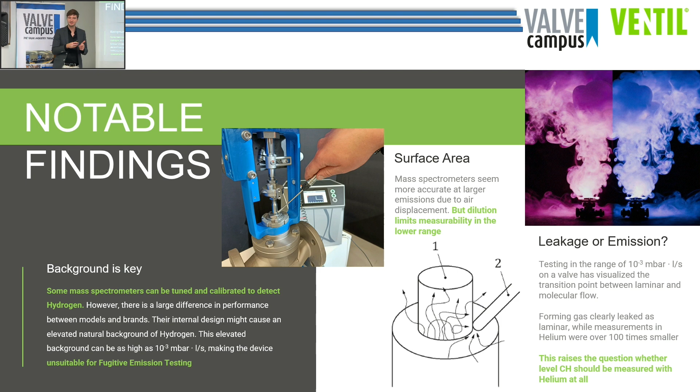So fast forward, how do you use forming gas? First of all, if you work for Shell, they have a separate leakage criteria in their Shell spec. This means that any valve which is fugitive emission tested for Shell, you're entirely free to use forming gas. There is a specification, it's written, it's exactly what you need to do, and there's a list of approved devices you can use. So you can do this already.

The second one is for hydrogen valves according to API 6D, which has similar requirements to Shell. The only difference is that API is a manufacturer standard, so it's a democratic process. Shell is practically a little bit more critical—they ask for a little bit more, so the test pressure is higher compared to the minimum in API 6D. Shell is also a bit more explicit in the things you need to follow.

So if you're trying to set this up, my recommendation would be to look at Shell, because they have the most elaborate standard for it—they'll give you the most guidance. If you can follow Shell, you can also follow 6D Annex M. The reason it's only in Annex M is a matter of opportunity: standards go through a revision cycle, and in the task group for Annex M we had the authority to write specs for hydrogen valves, but you don't automatically get authorization to change API 6D.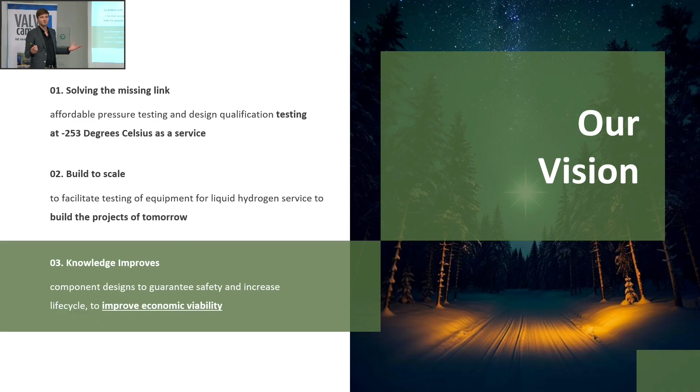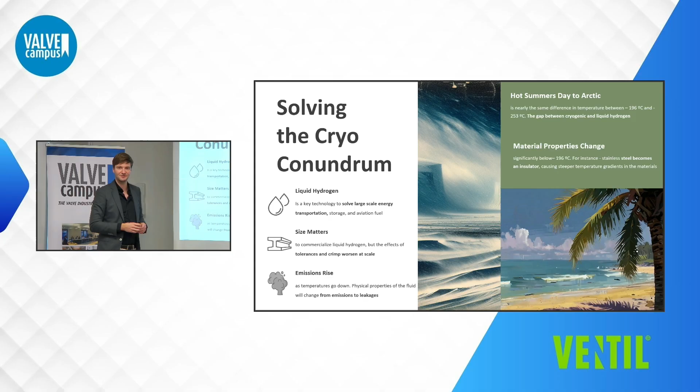And quite lovingly, I'd like to call this the cryo conundrum. It's sort of the counter-opposing things about cryogenics. Because the tendency is that cryogenics is good enough. Liquid nitrogen is good enough if you are producing liquid hydrogen valves. But in reality, if you look at the difference in temperature between liquid nitrogen, minus 196, and minus 253, the temperature of liquid hydrogen, it's about the same temperature difference as being in the Arctic versus being in the Mediterranean in summer. The temperature difference is huge.

As a human being, you would dress differently. You would not easily survive in the Arctic, but you'd be comfortable in the Mediterranean. The temperature difference is quite huge. And what we don't seem to realize is that if you look at leakage of gases, emissions and leakages, actually at those cold temperatures the effect is at its absolute worst because of the physical properties of the gases and fluids inside the pipeline. So the relevance is simply that we need to know if it's good enough, which means we need to do some sort of testing to establish minimal quality for valves.

And then in the conundrum, what we also see is that size matters, because liquid hydrogen valves have been around. It's rocket fuel, used in scientific applications. We even have liquid helium valves, because superconductors are cooled with liquid helium. But the reality is that all of those valves have a completely different operating profile and size compared to what we would do in the energy industry. Because rockets are not fired into space every day, right? So the valves are not used so often.

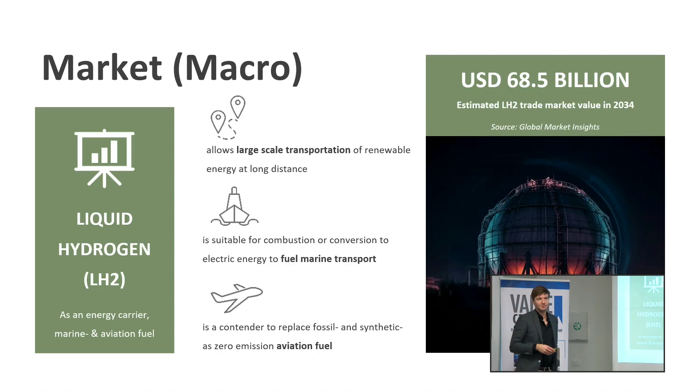So what do you look for in the market to understand if we're ever evolving into this? Is it really going to happen? Well, there are three projects which are interesting, which I always use to explain the relevance of this for us.

First of all, we know that Shell was one of the sponsors of that first liquid hydrogen carrier. They're not very open about it, but if you read the news, you can actually see that they funded it. And in the news, you can also find that they have started a development project, however quick it might go, to create a second liquid hydrogen carrier. One of the challenges is, how do I keep liquid hydrogen inside that tank without too much energy loss? In the news, project number one, they actually developed a storage tank with insulation which is not solely based on vacuum. Because the problem with vacuum tanks is that if I get a compromise in vacuum and air gets sucked in, the air is actually supercooled, which means the components will start to liquefy and freeze. And as it heats up, I might just get a flammable or explosive mixture in my vacuum jacket, which means that if anything happens, if there's the slightest bit of spark, everything would blow up. So having a different concept to insulate is one of the key factors to make the technology work on a commercial scale. So something is happening in the market.

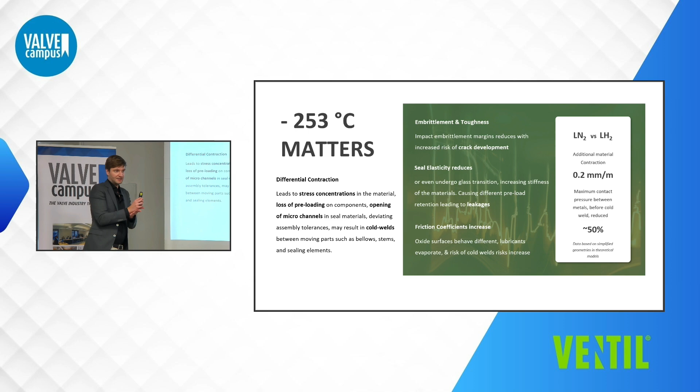And the effect is worsened when you put liquid hydrogen in the system, because it can very well remove oxide layers from steel materials, which means that contact stress is reduced even further. That means components that work perfectly at -196 could be stuck together after a couple of thermal cycles at -253.

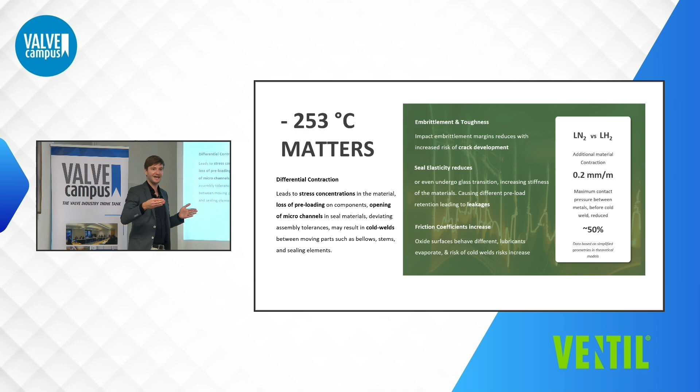Then if you look at the difference in contraction: obviously if I take a piece of stainless steel pipe and reduce the temperature by submerging it in liquid nitrogen, it shrinks, right? It's a concept we all know. Going even lower, the difference between liquid nitrogen and liquid hydrogen, per meter of pipe length, gives me an additional 0.2 millimeter shrinkage, meaning my pipe is 0.2 millimeters shorter. That may not seem like much, but if you look at machining tolerances, it's quite significant, especially for bigger valves—more material, more contraction, more deviation.

But it actually gets worse, because those numbers alone aren't very compelling—there's a difference, but what's really the difference? What people don't realize about these temperatures is that we feel stainless steel is a very good conductor. Don't you agree? If I put my hand on a stainless steel table, I can feel the cold, meaning there's a temperature differential. Probably you have stainless steel pans in restaurants and homes because they're good conductors.

But if you reduce the temperature enough—which happens once you go below liquid nitrogen temperature—it actually turns into an insulator. And that's a bit strange. If you look at space applications, for instance, where they go to outer space temperatures very close to absolute zero, they use stainless steel as insulators.

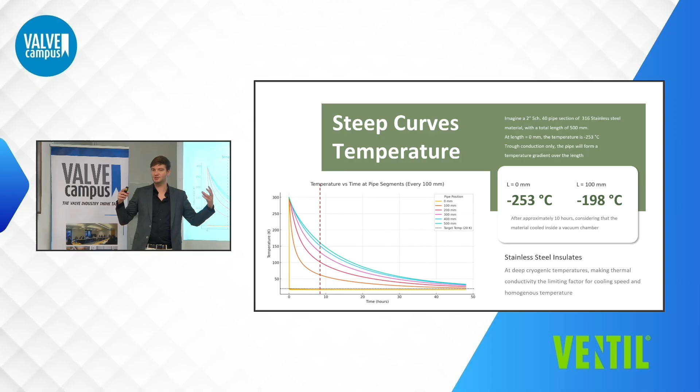Which means that if you look at my temperature profile here, basically what I try to do is simulate temperature over a length of pipe. So imagine a 2-inch pipe, 1 meter in length, or half a meter. I simulate the temperature every 100 millimeters, and let's presume all of my cooling power comes from the left end, from this side. That means I get a temperature gradient over the pipe, which is quite logical. And what we fail to realize is that because the material becomes an insulator, the limiting factor is not cooling power.

It's the ability for the material to conduct heat to a particular point. So if I have a valve that's entirely closed with liquid hydrogen on one side, I'll have a huge temperature gradient over a huge amount of time on the other side, because the heat is so slowly being drawn through the material.

So in the simulation here, just to illustrate, every single line represents an increment in the length. The yellow line here is 0 millimeters, this is 100 millimeters, etc. You can see there's a temperature curve, and it's quite a steep one. If I cool this for, let's say, close to 10 hours, my 0 point could be at -253, but at 100 millimeters I'm still at liquid nitrogen temperature. So I have a huge difference in temperature that would occur in the field as well.

And it doesn't have anything to do with cooling power or the contact surface of liquid hydrogen inside the valve—it's solely restricted by the stainless steel becoming an insulator along the way. It's a huge concern, because if I bunker a boat for a week, my temperature gradient throughout the installation will be continuously changing and could worsen significantly, meaning I have to compensate for that in my design. So it's not just thermal contraction—it's thermal contraction over time, temperature differences, etc.

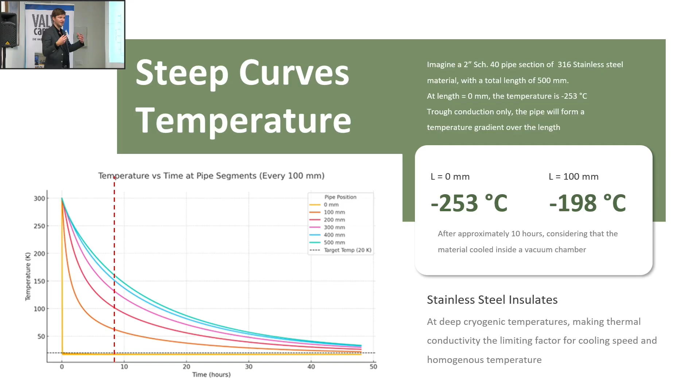So let's look at key technologies to facilitate this test. Because ultimately we just want to know, right? If we do a test, we know. And then if we know, we can decide what we have to do as an industry. We can write our standards, we can prepare, and we can make this into a success.

So the first technology is to cool in a reservoir. And the main limitation is that you need to have a coolant which is able to reach minus 253 degrees Celsius. And that leaves you with two options. The first is liquid hydrogen, which is very flammable, which means that's probably quite impractical to have in your facility. Also, you would have to get the liquid hydrogen from somewhere, which is a challenge nowadays, because production is not very big there. The second alternative is liquid helium, but liquid helium is very expensive, and there's only very few places in Europe and the US where you can actually get liquid helium.

And there is actually a story of manufacturers that rely on liquid helium, that they have reoccurring cycles where if they need to get liquid helium, they have to fight for their right to receive liquid helium, to a point where the truck could be on the way to their factory and they get a call and they turn around because something else is more important. So it's not a very sustainable way, considering that this could be a solution to our energy problem, which means that there's going to be a big volume of valves. If everyone needs liquid helium, it's simply not going to work.

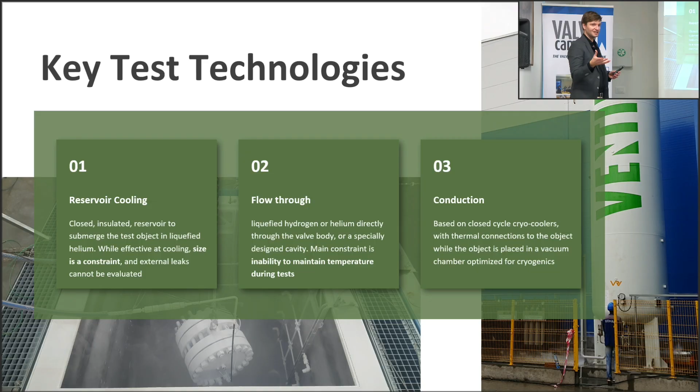So the other option is to go with flow-through, which essentially means I mount the valve into a pipeline and I run liquid hydrogen or liquid helium through it. Because ultimately this could be close to the operating profile that I have in mind, which means that I cool it down by just introducing the liquid inside the valve. So it will cool down, but the reality is that it's a fairly expensive thing to do, because the installation that you need is quite big, and it's probably what they have at space agencies. We asked around how much it would cost to do a test like this, and it's expensive. So it doesn't seem like a great way to go, mostly because if we cool it down to that temperature, we don't really have the measuring conditions to be able to measure in an accurate way.

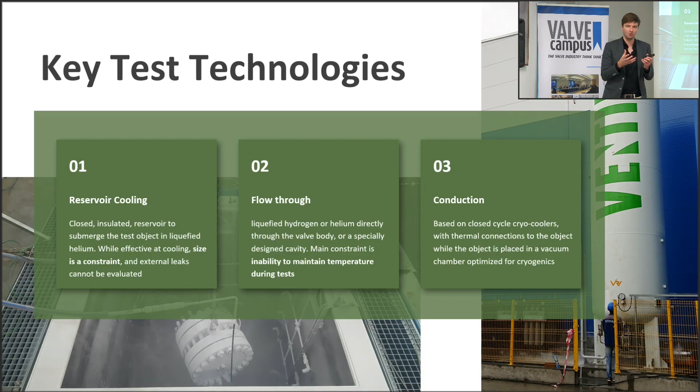Because if we talk about fugitive emissions, for instance, I would not really be able to do my qualification test on the stem or the body or whatever, because the liquid I use for cooling is also the tracer that I want to use for leak detection. And then if I decide that I cool it and I take it out, then I will never be at -253 because it will heat up over time. So it brings some concerns about, can I even achieve that temperature range? Because it's impractical, period. And that leads us to the third option, and I think you can hear it coming.

This is what we're aiming for, and it's based on conduction, basically. So we're not using liquids for cooling, but we want to draw heat from the material using conduction. So just to tease you, we believe that this is the best solution, what we call deep cryogenic testing, and it's inspired by technologies used in the space industry. The idea is that we use cryogenic coolers, which only consume electric power, and through conduction from the material, we draw heat out until we reach the temperature that we want to achieve. So it's controllable. We don't need any technical gases or fluids to achieve that temperature. And we can do pressure testing based on helium and even on liquid hydrogen. So we're not using it for cooling, we're using it for testing instead, because we can create stable measuring conditions.

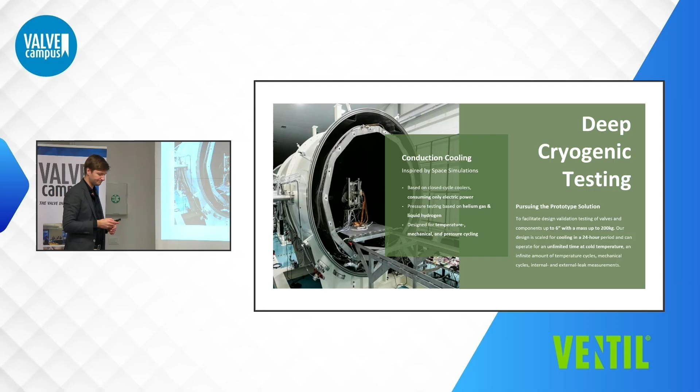Then if we compare the different technologies, because obviously you have to make, for a good business case, a good comparison, basically what we see is that conduction cooling has fairly low operating costs, because we only consume electric power, but the capital expenditure is quite high. And it mostly has to do today with the fact that we don't know what it takes. Small scale, large scale is a completely different story. So it seems that the investment cost is fairly high today, but it could very well be that once the technology matures, it's actually a competitive method compared to using liquid nitrogen to reach -196 degrees Celsius.

So we don't rely on technical fluids and gases because it's just electric power. The only thing we would use is helium and liquid hydrogen for testing itself. So it's the test medium, which means that the consumption is less. We can maintain -253 degrees Celsius. We can test uninterrupted without limitation. There's no limit to how long you can test. And the measuring environment is controlled. So we can measure very accurately what external and internal leakage would do inside the valve at any given stage, during cooling and at cold temperature, mechanical cycles, pressure cycles, etc.

And the other methods, they tend to have high operating costs because of those technical fluids, right? It's either that, because we have to purchase it and it's limited availability, or it has to do with the infrastructure that we need to make it or maintain it. Creating your own liquid hydrogen, creating your own liquid helium is just very expensive, period.

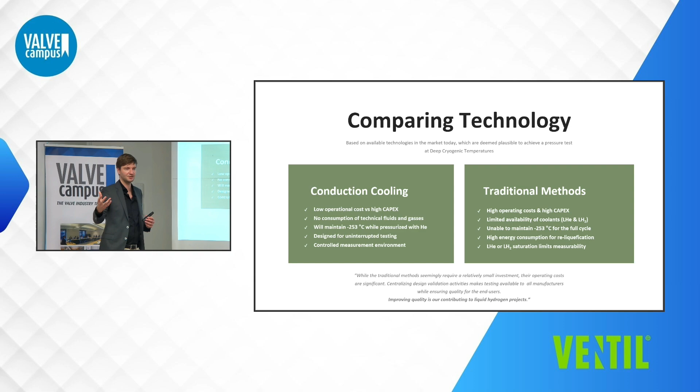Also, we see issues with the measurements that we want to do, because we would rely on coolants, which are also our tracers. And you could think helium and hydrogen are separate matter. So if I cool with one and I test with the other, that should go. But that's not the case, because your helium or hydrogen leak detector is never insensitive to the other medium, which means that it gets polluted if there is a high concentration of the other substance. So if I measure based on helium, but I have a high concentration of hydrogen, the masses of the molecules are so close that it influences my test result, making the test essentially useless.

So how it works. We intend to use cryocoolers, and they will be optimized for the temperature range that we need to achieve. In cryocoolers, I have a next sheet to explain a little bit more. I'd like to compare it to a fridge. If I have to tell my wife how it works, I tell her, you know, we have a fridge and it has a compressor and an expander. What happens is we compress a coolant, and when it expands, we draw heat from the environment. And in our fridge, we cool the air, and the air is in contact with my beer, and then after a while, my beer is cold and I'm happy. I can recompress my coolant, which means that I have a continuous cycle going on.

There are coolers that can actually achieve these temperatures, but they really have to be optimized for cooling because they are never designed for use cases like this. The combination of size and mass is quite a challenge for the suppliers of these materials. So there is nothing available in the market today which will give you flying colors, basically. There are still some developments to do there.

Then also what you need to consider is that the cooling capacity is fairly limited, which means that if we want to be quick and achieve our 24-hour time span, we might want to have higher temperature coolers for the first stage of cooling, then thermally switch them off, and then go to a lower stage cooler. And if you don't have thermal switches and thermal connections which are optimized, you will never reach that temperature. So again, it's something to really consider in the design, which all depends on scale of the solution.

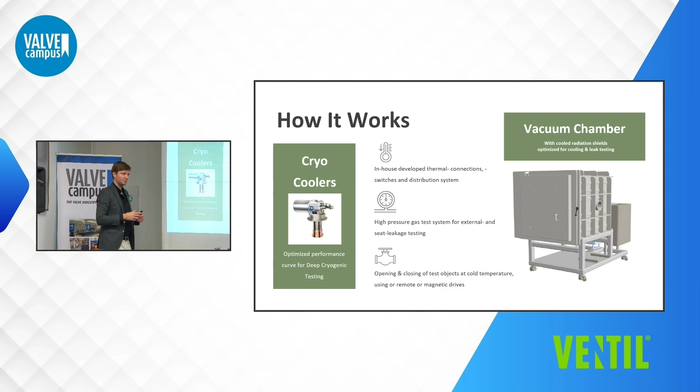And then finally, if you look at thermodynamics, we're left with radiation. So once you cool down, you'll see that radiation will actually heat up the valve quite a bit. So it means that we would cover the insides of the vacuum chamber with a pre-cooled radiation shield to make sure that the effect of radiation is as little as possible. And by doing so, we can simulate a situation which could happen in the field. You know, it's sunshine, it's warm weather, cold weather, etc. But we do everything at a smaller scale because our cooling power is a bit limited. But it's a very manageable process.

And just to clarify how that cooling works. The main principle that we intend to use is a Gifford-McMahon cooler. And it's a principle which has been developed a very long time ago, and it's a regenerative cooling process. So the principle is that you use helium for cooling, so you compress it and you let it expand, from which it draws heat from the environment.

So not like your fridge where the compressor is continuously running, basically. This is a cycle process. So it's gas in, gas out. And as it goes on, the temperature goes down. If you look at the design of these in the market, as a rule of thumb, there's 4K and 20K coolers. And the 4 and 20K refers to temperature, not in degrees Celsius, but in Kelvin. So 20 Kelvin is -253, give or take.